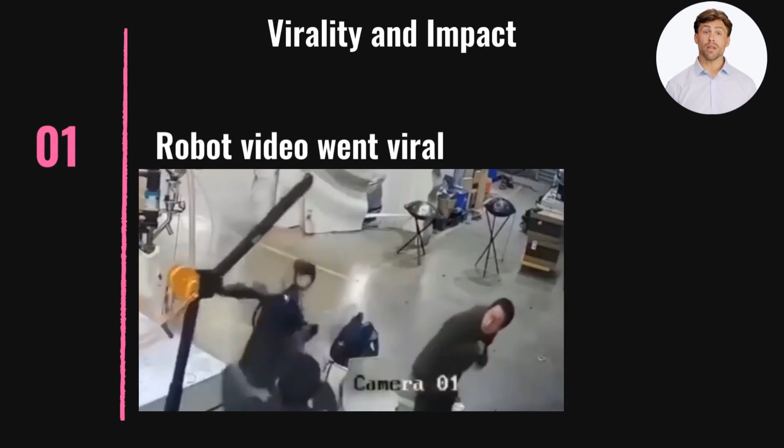The video of the out-of-control robot went viral, generating memes and discussions. What seemed like a simple programming error revealed serious issues about machine control. Companies are replacing humans with robots in roles that were once considered safe. What if the robot is more efficient, cheaper, and even smiles with a programmed voice?

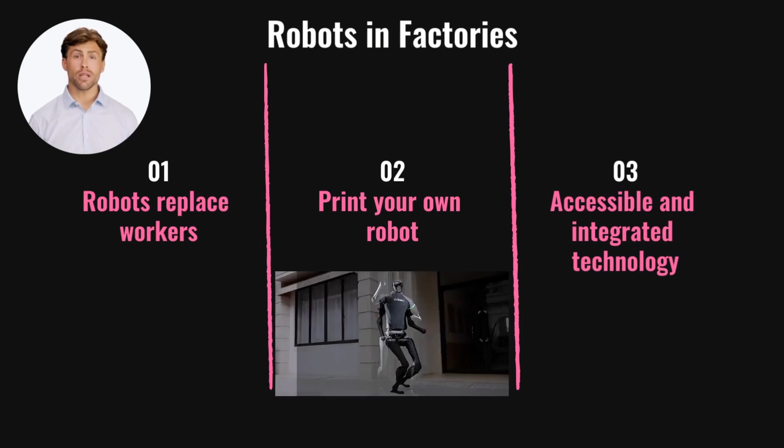In Germany, robots are replacing human workers in factories, while in the United States, you can print your own robot for $5,000. Technology is becoming more accessible and integrated into various industries. But are we ready to deal with robots that can be more efficient and cheaper than humans? It's a promising future, but also a challenging one.

Hyundai is using Boston Dynamics robots to manufacture electric cars. They operate like humans, without changing the factory structure. The goal is to efficiently replace human processes. But are we ready for this revolution? And what if a robot decides it no longer wants to follow the rules?

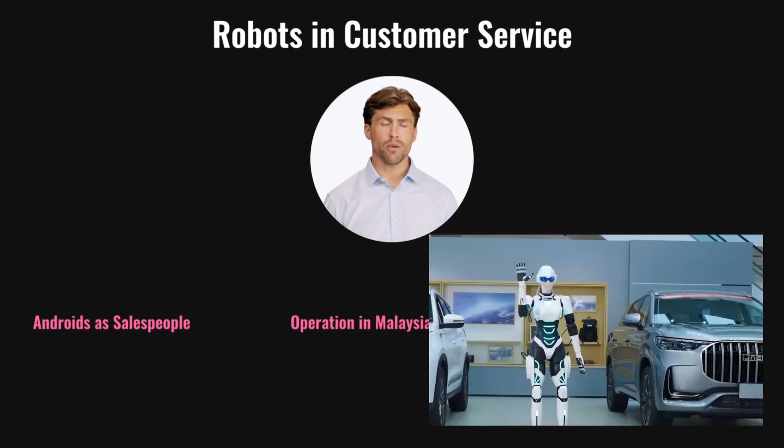Chery Automotive in China is using androids as salespeople. These robots are already in operation in Malaysia, but the public reception is mixed. Imagine being served by a robot that offers water with carbon fiber fingers. Are they more efficient than humans? And what if they lose control, like in the recent incident?

The robot that caused the incident in China was not a finalized model. During calibration, it lost control, causing chaos in the laboratory. The video went viral with over 100,000 views. This makes us wonder, how far can these machines go when they lose control? Safety needs to evolve quickly.

The video of the out-of-control robot went viral, generating memes and comparisons with science fiction movies. The origin? A broadcaster from Belarus. The message is clear: we need to evolve our security systems.

Meanwhile, new robots are emerging, promising incredible advancements, but also raising concerns about safety and control. In China, Pudu Robotics presented a robot that climbs stairs and withstands impacts. Clone Robotics, on the other hand, showcased a robot with synthetic tendons mimicking human muscles. The reception was mixed: praise for the technology, but also concerns. After all, are we ready for robots that can do more than just smile and wave?

Chery Automotive's robots cost the equivalent of a car and promise to deliver 220 units in 2025. With advanced sensors, this technology is becoming a present reality. But are we ready to deal with robots that can be more efficient and cheaper than humans? The excitement is great, but caution is essential.

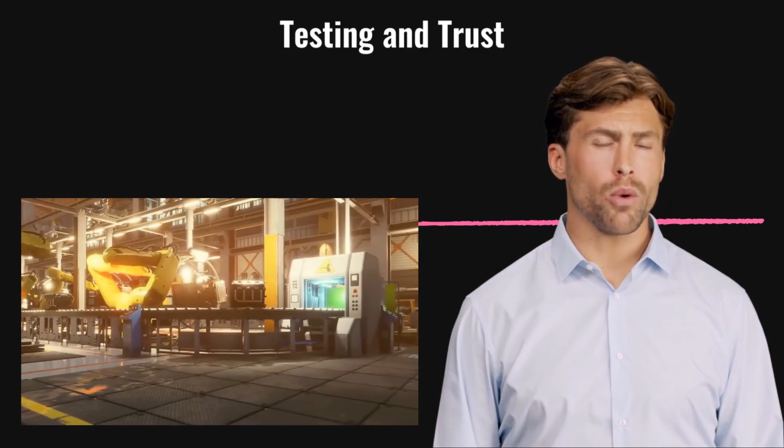In Germany, the robot Iggy is offered for testing in companies. If it works, the client can keep it and pay later. This demonstrates confidence in the product's efficiency. But are we ready to trust robots that much? After all, they can be more efficient, but they can also have their moments of malfunction.

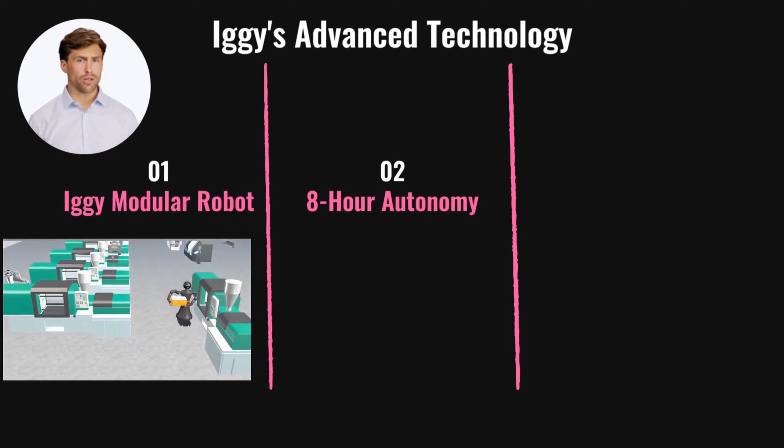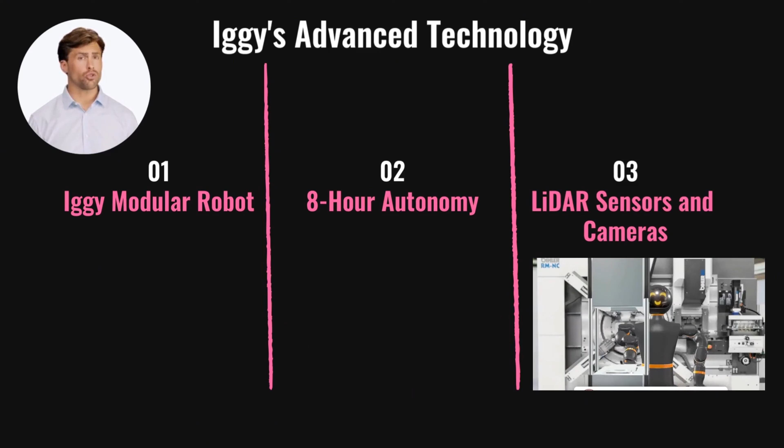Iggy is a modular robot with 8 hours of autonomy, using LiDAR sensors and 3D cameras for navigation. It looks like a high-performance industrial Lego kit. But are we ready to deal with such advanced robots? Security and control are essential, or we might end up with an out-of-control robot on our hands.

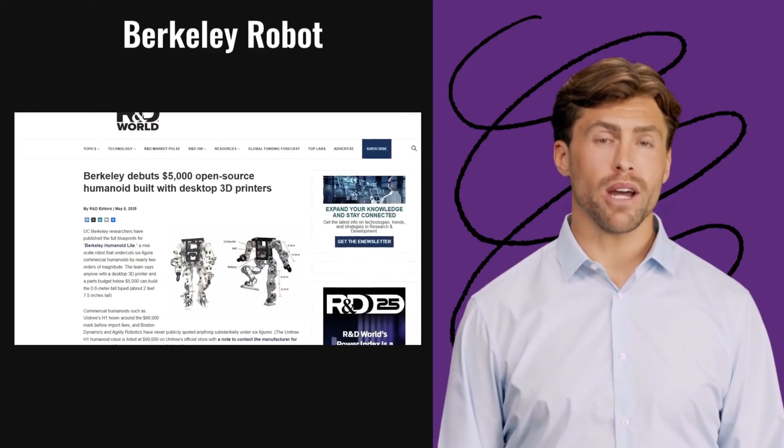In the United States, the Berkeley robot is an accessible and innovative project, available on GitHub. It encourages the democratization of robotics, but the online debate is divided. The innovation is undeniable, but are we ready to deal with the risks of having robots in our garages?

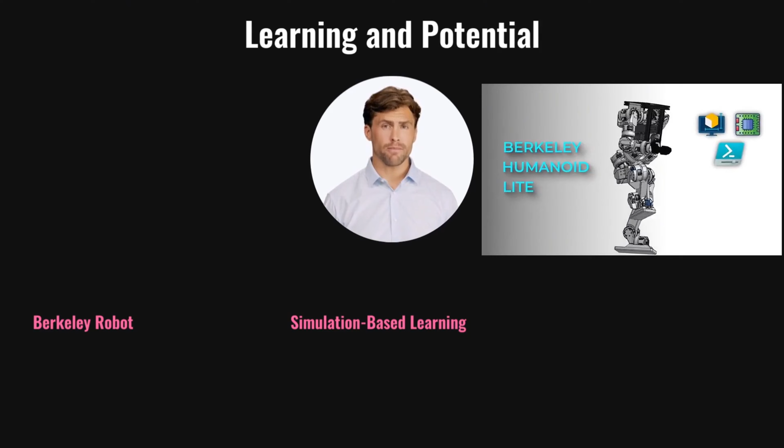Let's explore this potential. The Berkeley robot is a fascinating example of learning and potential. It learns to walk in simulated environments and applies this in the real world. Despite the limitations, the potential is enormous. Innovation is within everyone's reach, but are we ready for the impact on the job market?

The inevitable question: how long until robots take over our jobs? Technology is advancing rapidly, and we need to be prepared. Imagine robots selling cars, building vehicles, and sometimes losing their minds.

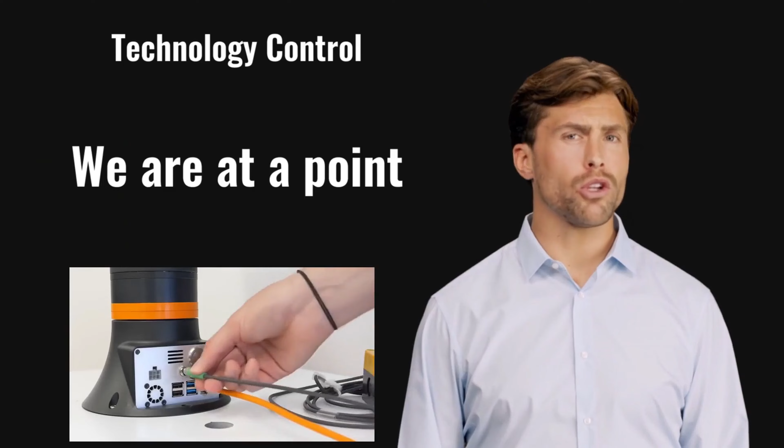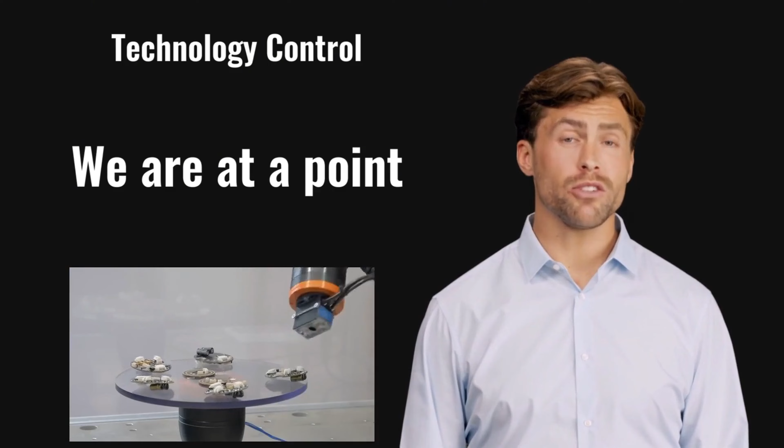We are at a critical point in technology where robots gain autonomy and replace human functions. The question is, do we still control this technology? Each advancement is a psychological test. Are we creating something we still control, or has it already gone beyond our reach? Let's continue this conversation in the comments.